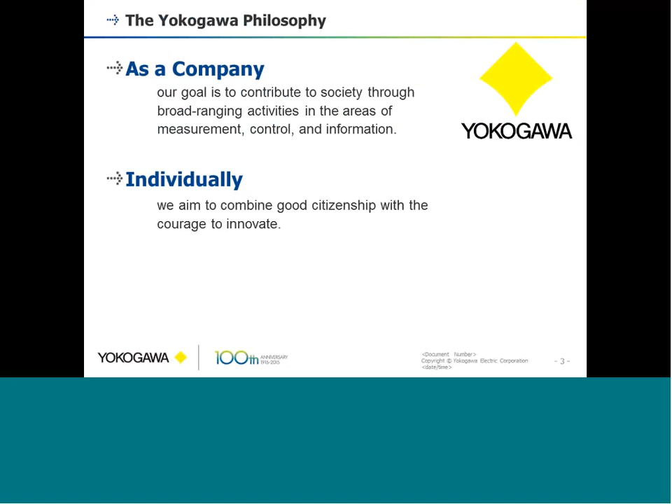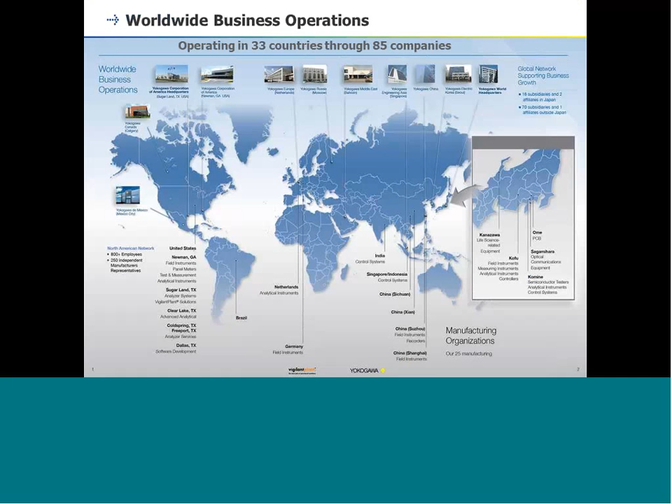We were founded in 1915 in Japan, and we came to the North America marketplace in 1957. We currently operate in 33 different countries with 85 different sales offices and companies within those countries. In North America alone, we have 4 headquarters: an office in Calgary, Canada, one here in Newnan, Georgia, just outside of Atlanta, one in Texas, and one in Mexico City.

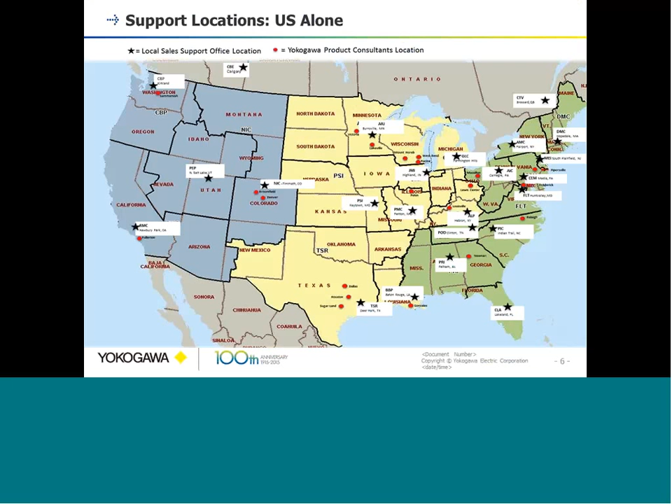Outside of these main headquarters, this is just the U.S. We have offices all over the U.S. for support of people right in your backyard.

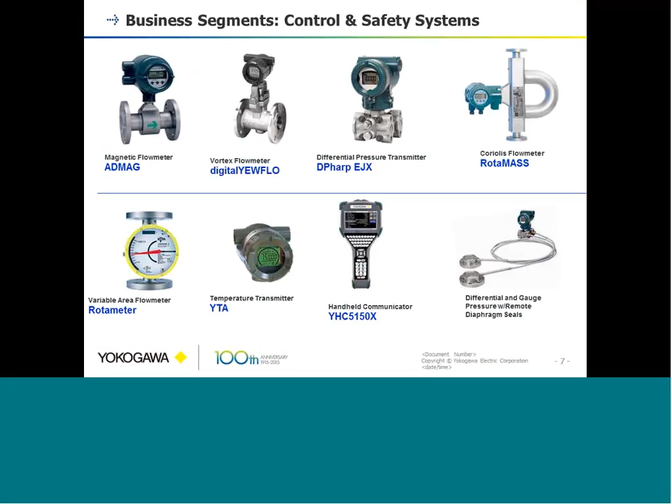For the industries and products that we offer, we have anything from control and safety systems that you'll use in your control room, to your field instruments, your pressure and temperature transmitters, to your data acquisition, controllers, recorders, signal conditioners, gas analytical measurements that you may have in your process, and your liquid analytical, your pH, your conductivity.

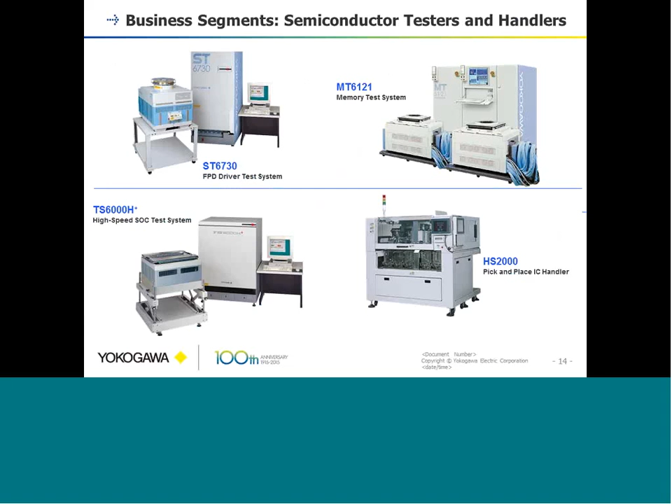We also have a system integration group called Measurementation, and they do anything from CEMS systems to actual sample panels, water analysis panels, complete shelters. We also have a semiconductor division, a test and measurement division, a meters division for calibrators, handheld communicators, and a life science division. So that just gives you a basic overview of Yokogawa.

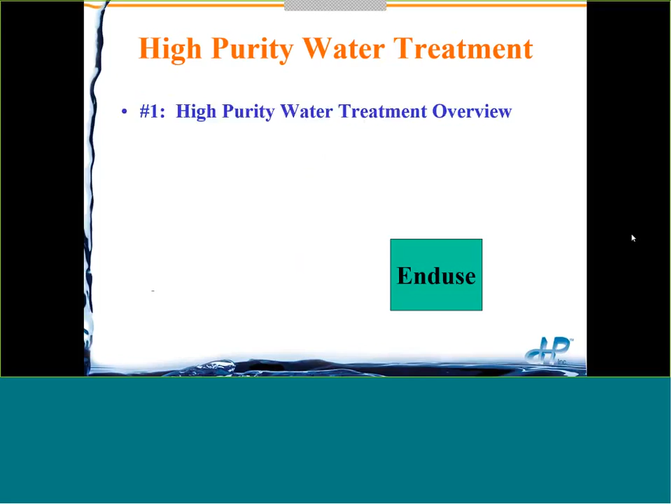With Yokogawa, we are doing a 4-webinar series basically on high purity water, but we're taking it section by section. So 2 weeks ago, we had a high purity water treatment overview, and in that overview, we looked at how in today's high purity water treatment systems, almost always you have reverse osmosis as one of the treatment steps. That's the big gun, the bulk total dissolved solids removal piece of equipment or technology.

And the equipment in front of the RO unit is called pre-treatment. It's there to protect the RO unit. We're going to talk about that in a couple of weeks.

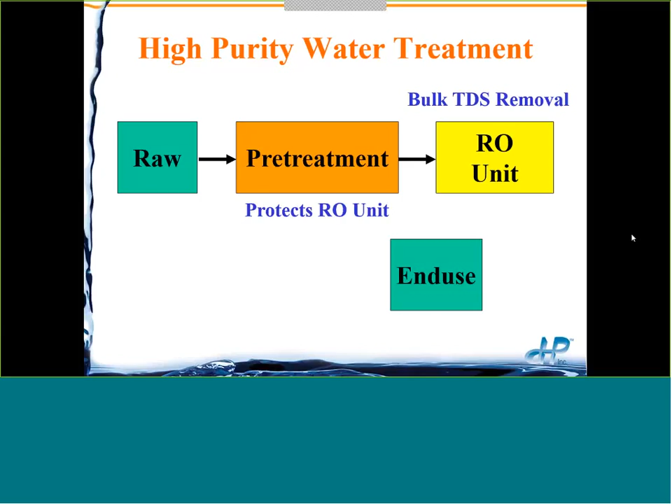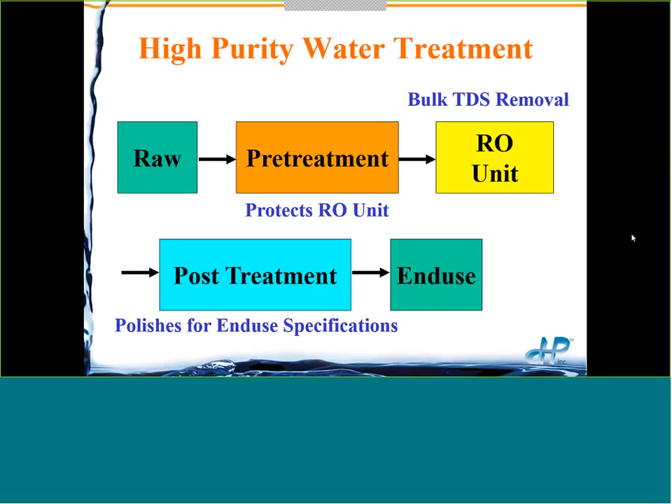And then the permeate coming out of the RO unit, since it rarely meets end-use specifications, we usually have to polish it. That's called post-treatment.

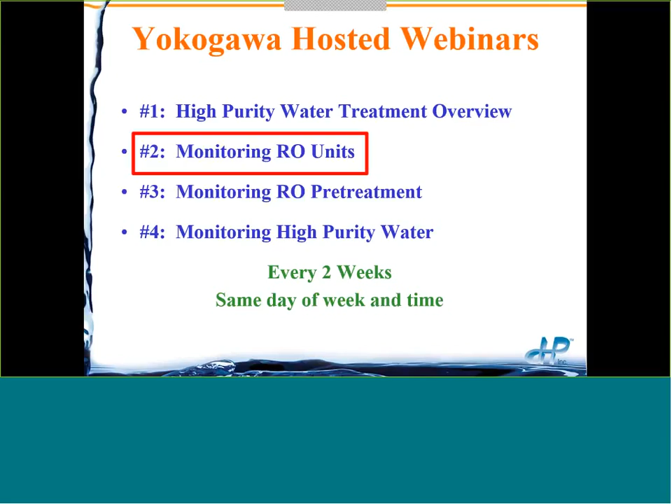We started out 2 weeks ago with the overview. Today we're going to talk about RO units, again with emphasis on monitoring and trending. Then 2 weeks from now, we'll do the same thing with pre-treatment. And 4 weeks from today, we're going to be looking at monitoring the post-treatment, or the high purity water. It'll be the same time and day of the week each time, just 2 weeks apart.

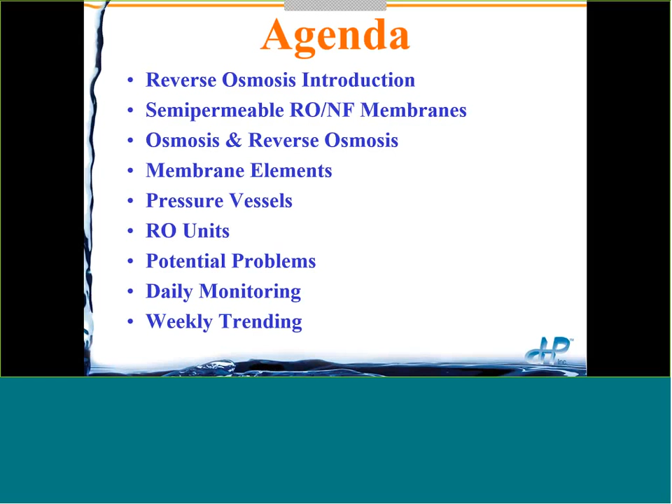So today we're looking at reverse osmosis. This agenda that you see - we have 1 day, 2 day, and 3 day seminars that cover basically this exact same agenda. So in 1 hour, we're not going to be able to go into a lot of detail, but you'll get the high points and understand when we get to the monitoring and trending.

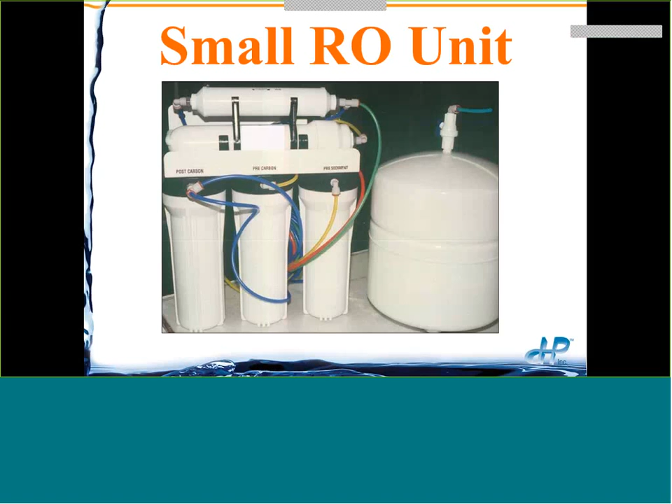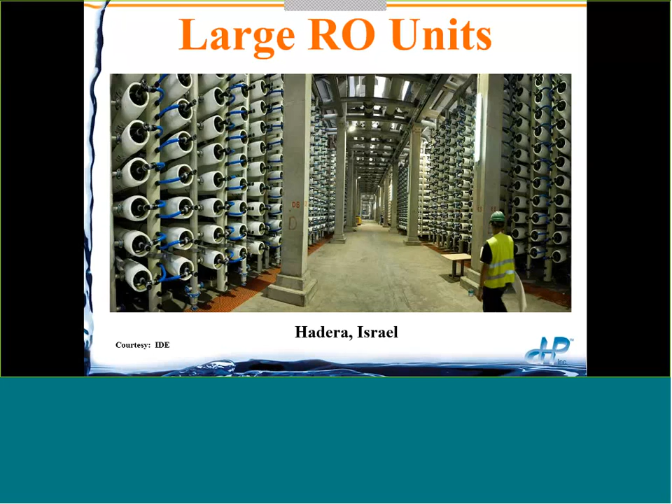Just a quick introduction. Everything I'm going to say is going to be true for the smallest RO units or the largest RO units. Reverse osmosis is reverse osmosis. Whether we're talking freshwater, brackish water, or seawater, the principles are the same. The pressures are going to be different, but the principles of operation are going to be the same.

So here is a particle size scale, and this isn't precise, so you're not going to see this in a chemistry course. But I think it's valuable in today's water treatment to think of 1/100th of a micron - a human hair is about 100 microns. So 1/100th of a micron is very small. Things that are larger than that are particles.

So we see here some examples. Virus - we know that's a very small particle. Even if we chop the virus up into 100 little pieces, our most powerful microscopes would still see a little piece of something, and we would call that a particle. You'll hear them called suspended particles, but just think of it as a particle.

If they're smaller than that, then they're dissolved. We have conventional water treatment that's been developed over the last 100 years or so to remove the bigger particles. But in today's world, if we want to remove particles greater than around 1/10th of a micron, we're almost always going to use membrane technology. We're going to make a membrane that has holes or pores through it of 0.1, 0.2 micron.

We call that membrane technology microfiltration. If we want to remove essentially all particles, then we'll have a membrane that has pores through it in the 0.01, maybe to 0.05 micron range. We're going to call those ultrafilters, and that's an ultrafiltration technology.

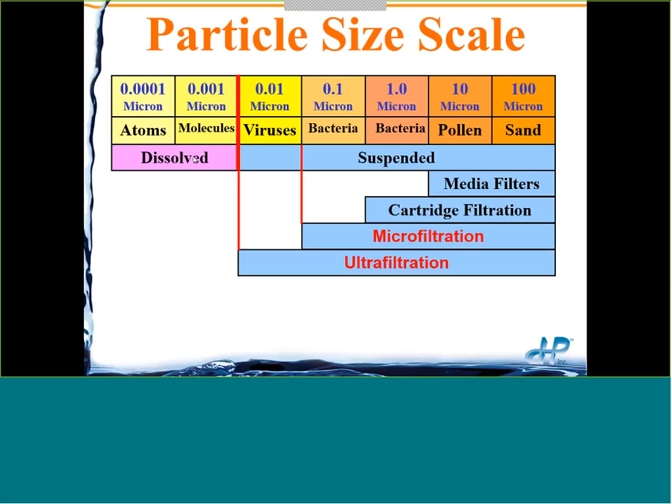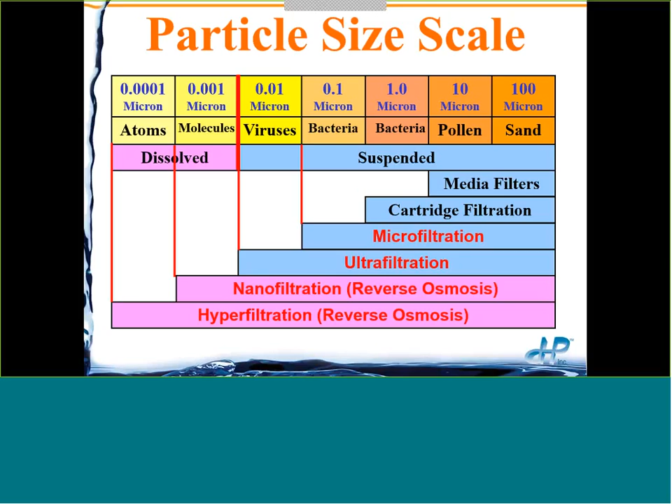But when we want to remove dissolved substances, we are now in reverse osmosis. Reverse osmosis comes in 2 flavors: nanofiltration, which is a looser RO membrane, and hyperfiltration, which is the tightest membrane. You don't hear the word hyperfiltration very often. You usually hear MF for microfiltration, UF for ultrafiltration, NF for nanofiltration, and RO for hyperfiltration. But just remember that nanofiltration removes dissolved substances, therefore it is a reverse osmosis membrane.

These membranes are semi-permeable. They're permeable to water molecules - in other words, water molecules can pass through in either direction readily. Not very permeable to much else. So suspended particles - if the membrane was perfect, then no suspended particles would go through. And if the O-rings were perfect...

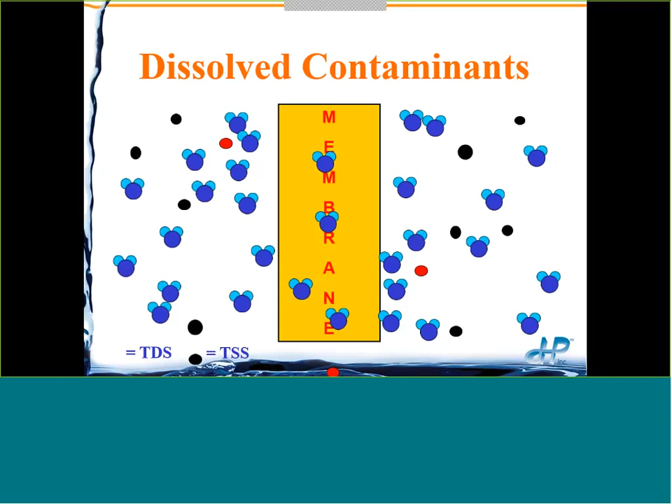Dissolved substances, though, do pass through - the little red balls there are dissolved substances, but they pass through slowly. So that's different. This isn't like a filter that we're used to, where if the contaminant is larger than the pore size, it will never go through. Well, that's not the case with RO. The dissolved substances can go through by diffusion, which is random motion, but they don't go through very quickly.

The charged contaminants, and this is going to be most of what we deal with in water treatment - calcium, magnesium, potassium, bicarbonate, sulfate, chloride - all these things that have positive and negative charges are very, very well rejected by RO membrane. And the more charges a substance has - we call these ions, if they're charged we call them ions, or ionic - well, the more charges, the better the rejection.

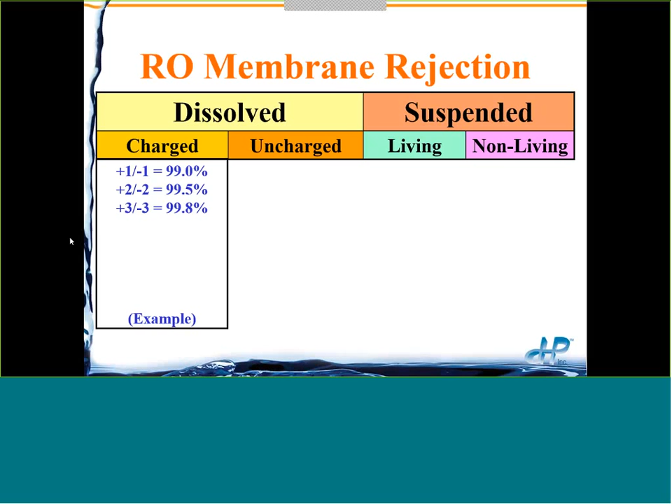Uncharged things have to be rejected based upon size. That's why water molecules go through - water is uncharged, even though it's polar. It does not have a +1, +2, -1, or -2 charge. It's neutral, and it has a small molecular weight of 18. So anything with a molecular weight of 18 or smaller and is uncharged is going through that membrane.

The gases - oxygen, nitrogen, CO2, hydrogen sulfide, all of the gases dissolved in water - go through the membrane. There's little, if any, rejection of dissolved gases. Other things like uncharged organics and uncharged silica have to be rejected based upon size, and we infer or approximate that size from the molecular weight, MW.

We know water has a molecular weight of 18, so we'll round it off. These are just approximations I'm showing you here: 0 to 20 molecular weight, there's going to be no rejection. By the time you get to 50 molecular weight, maybe we're up to 40, 50, 60% rejection. By the time we get to 100 molecular weight, we're probably in the 90% rejection range. And by 200 molecular weight, now we're into very high rejections. So the larger the uncharged substance, the better the rejection.

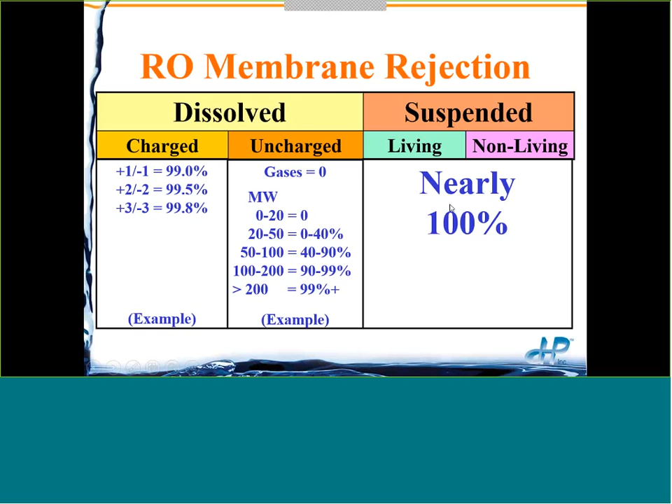A perfect membrane, if it's able to reject suspended substances, would be 100%, but nothing's perfect, so you'll get a few of the tiniest suspended particles that go through - but it's nearly 100%. Okay, so now let's move on to the next topic, osmosis and reverse osmosis.

Osmosis is the tendency of water to pass through a semi-permeable membrane into a solution of higher TDS. In this picture, the rectangle is an RO unit - it could be the smallest RO unit in the world or the largest. The diagonal line is all of the membrane, all of the semi-permeable or RO membrane that is in that RO unit.

When your high pressure pump is off, if you have feed water on one side and permeate on the other side of the membrane, osmosis will occur, because osmosis is the tendency of water to pass through a semi-permeable membrane from lower TDS to higher TDS.

For those of you dealing with seawater RO units, especially ones that have been around a long time, you'd have a suck-back tank. So when you shut down your RO unit, there was enough permeate to suck back and provide the water for osmosis. You don't see that as much today, but it was very common a long time ago.

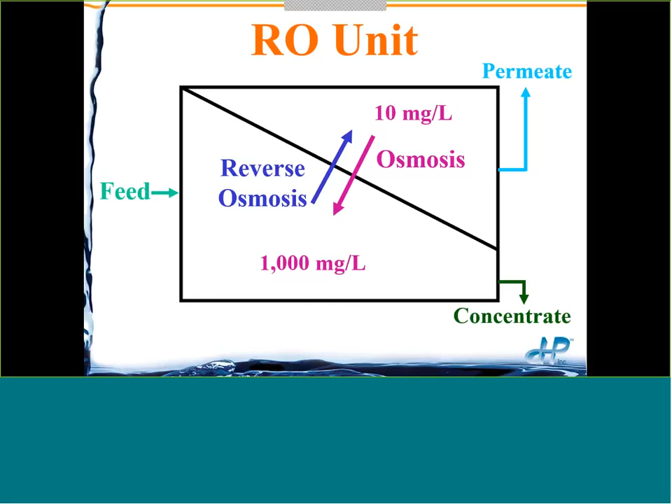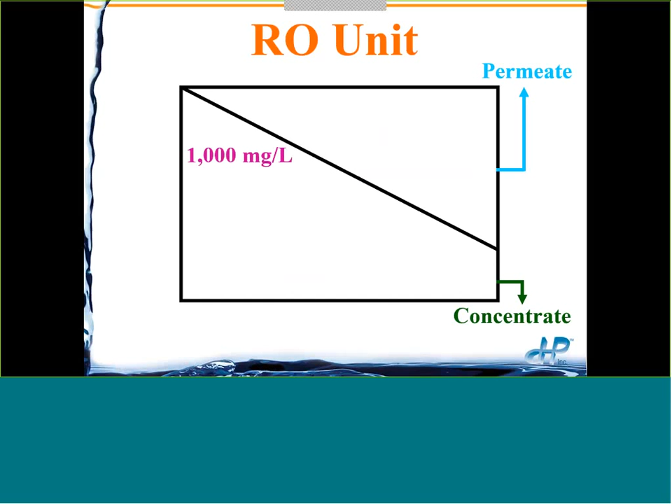To reverse osmosis, we have to get water to go in the opposite direction, from the feed side to the permeate side. To do that, we have to overcome the back pressures - there are two back pressures we have to deal with. The osmotic back pressure, which is really the force of osmosis, is a function of the dissolved solids content on the feed water side of the membrane.

In American units, you just divide this by 100, moving the decimal place over 2, which gives you a ballpark osmotic back pressure - not exact, but a ballpark. In metric units, you divide the milligrams per liter by 1,500, which gives you an approximate bar pressure for osmotic back pressure. So we have to overcome the osmotic back pressure, and we have to overcome the permeate back pressure.

If the permeate is going right to an underground tank, there would be very little back pressure. If it's going into a 30-foot or 10-meter high tank, then we're probably looking at close to 15 psi or 1 bar of back pressure. We have to overcome these back pressures in order to reverse osmosis. In this case, we have 25 psi or 1.7 bar of back pressure.

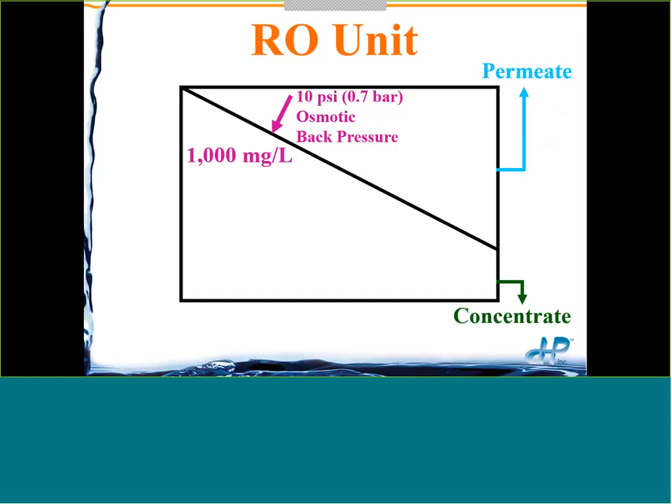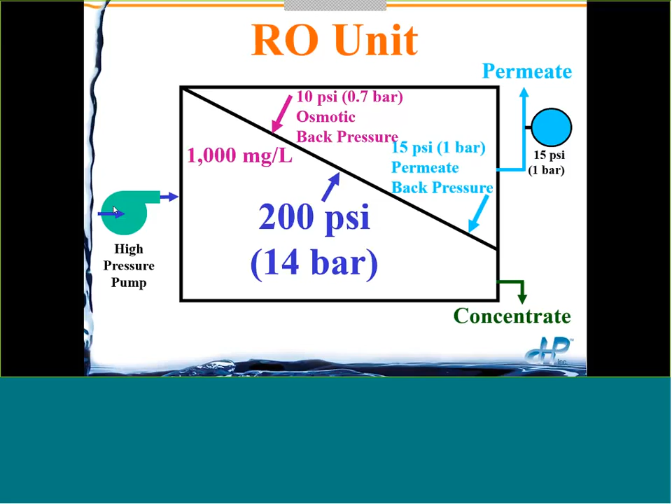So we are going to take a high pressure pump - whoops, sorry, went the wrong way - take a high pressure pump, pre-treat the water, pressurize it, and give it enough pressure to overcome the back pressures and reverse the direction of osmosis, and that's what we call reverse osmosis.

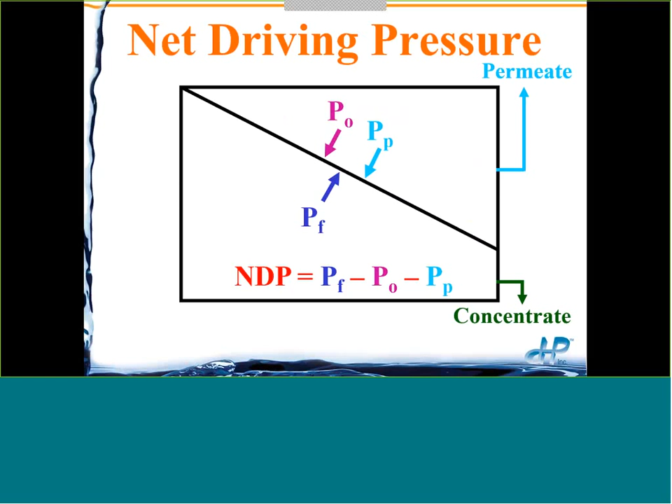Net driving pressure is what forces water through the membrane, and that's simply the feed pressure minus the two back pressures: the osmotic back pressure and the permeate back pressure. In a longer course, we would spend 30 minutes to an hour and have you play with calculating net driving pressure.

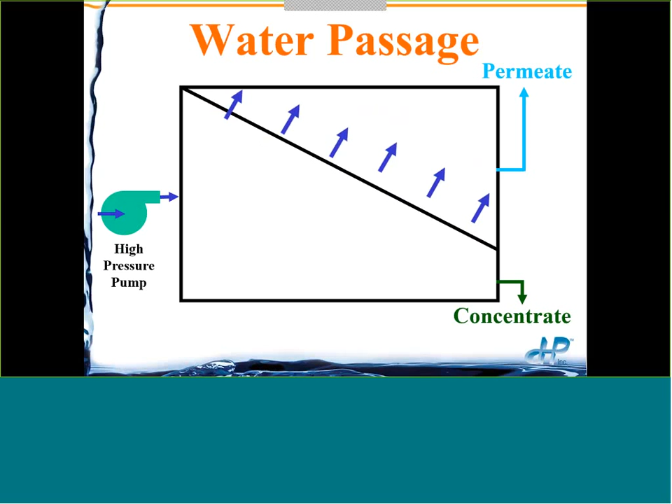For this, what I want you to see is this is the way RO units work. You take a pre-treated feed water, pressurize it in a high pressure pump, and send it into an RO unit. Due to the net driving pressure, you force a lot of water molecules through that membrane. The dissolved substances can't go through the membrane very readily, so they're concentrated. Every inch or centimeter of the way from the feed to the concentrate, also called brine or reject, the total dissolved solids, the TDS, are concentrated more and more.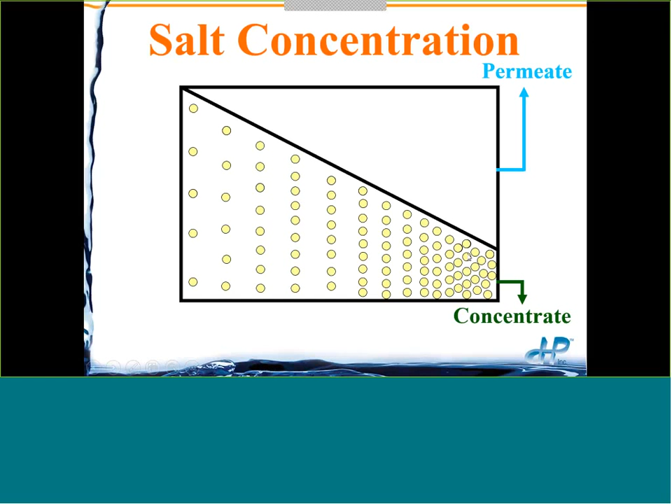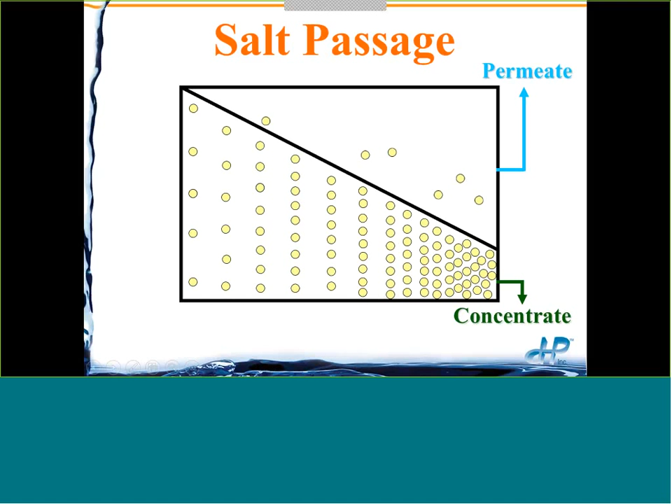But they're all diffusing, moving randomly, and due to that random motion there's a certain amount of diffusion. You have more concentration in the last inch or centimeter than in the first, so you have more diffusion in the rear of the RO unit than in the front. That means you're going to make better quality permeate at the front and worse quality permeate in the rear.

So putting those two together, the way RO units work is you take this pre-treated feed water to a high pressure pump, which gives a net driving pressure that forces a lot of water molecules through. Every given moment there's a little bit of diffusion, which is diluted by a whole lot of water molecules. That's how we can go from seawater at over 40,000 milligrams per liter to drinking water of less than 300 to 500 milligrams per liter.

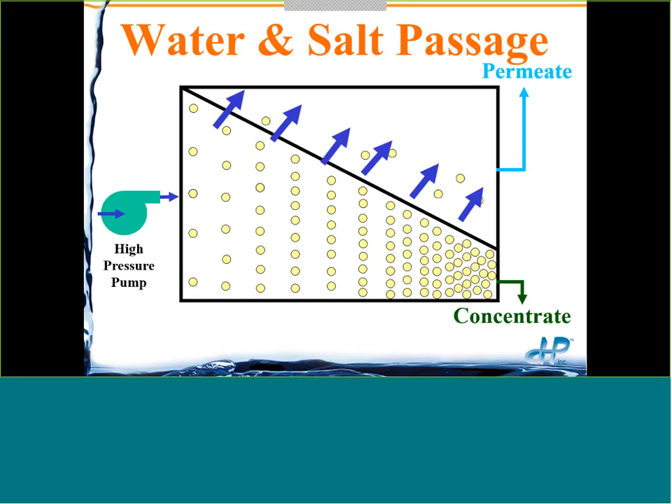Excellent technology. One other thing to know about membranes is that temperature has a huge impact on your pressure requirement. As water is warmer, it's less viscous—you can think of it as thinner. So the warmer the temperature, the lower the viscosity, and the lower the viscosity, the lower the net driving pressure required to produce the same amount of permeate.

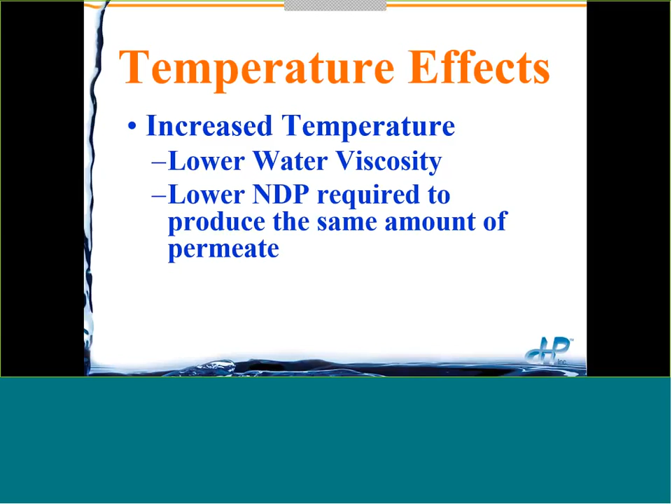So if you're in a place where your feed water is warmer in summertime and colder in wintertime, you'll have to apply the least amount of pressure in summer, and the most amount of pressure in winter, to make the same amount of permeate.

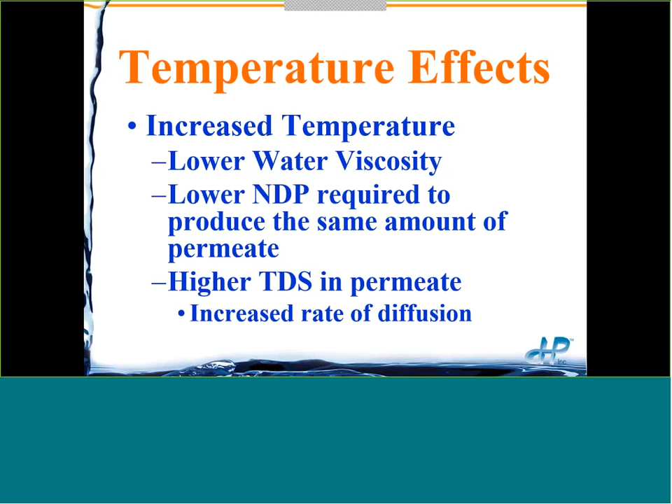The other impact of temperature is on diffusion. As the temperature is warmer, dissolved substances can diffuse through the membrane easier. So in the summertime you'll make your lowest quality permeate, and in the wintertime you'll make your highest quality permeate.

Okay, so that's talking about the membrane. Now the membrane is put into a piece of equipment called a membrane element. Again, we'd spend an hour or two—in our seminars we actually have you make simulated RO elements so you know exactly how they work. We're just going to look at them here.

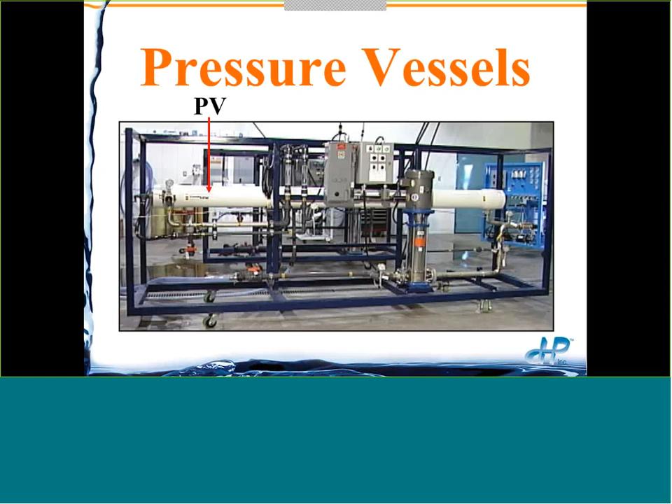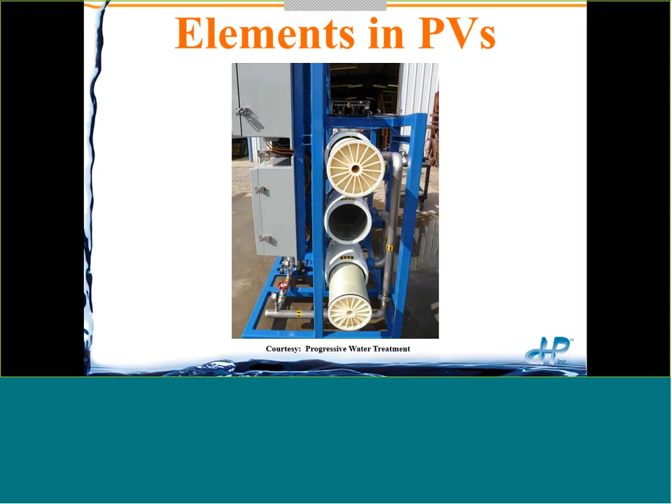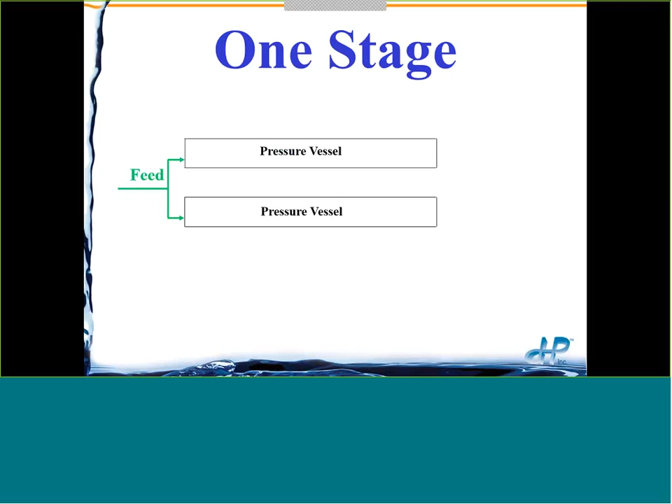The pressure vessels, in parallel and in series, then make up the RO units. If the high pressure pump is only feeding one set of parallel pressure vessels, each pressure vessel produces permeate—that's the water that goes through the membrane—and each pressure vessel produces brine, reject, or concentrate. If the feed water just goes to one set of parallel pressure vessels and the concentrate then goes to drain, that's called a one-stage system.

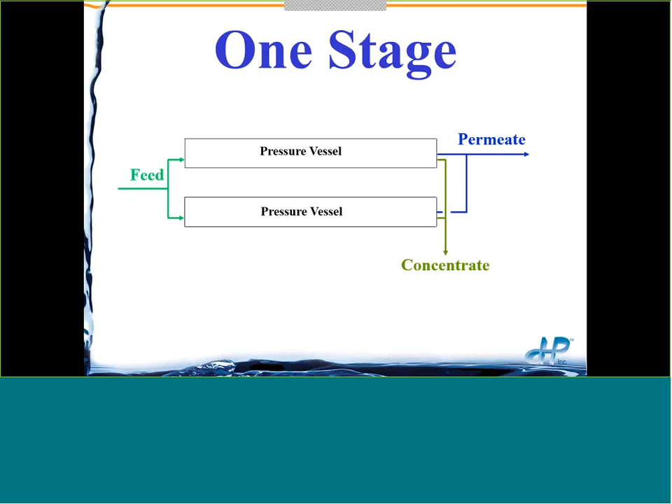99.99% of all seawater RO units are going to be one stage, because a stage will give you roughly 50% recovery, meaning 50% of the feed water will go through the membrane. Seawater RO units on real seawater, not dilute bay water, will be less than 50% recovery. In industrial applications, the most common is 75% recovery.

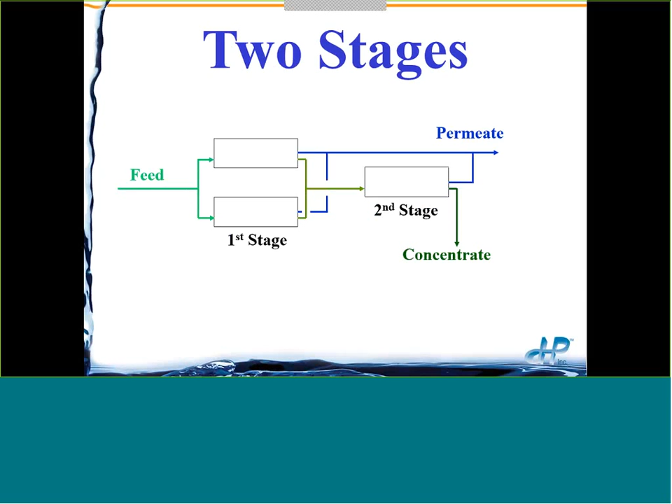In this case, we take the concentrate from the first stage and send it to a smaller number of pressure vessels - that's called the second stage. When you're getting into 75-80% recovery RO units, you'll typically see a 2-stage system. If you go higher, to 85-90% recovery, it's not uncommon to see 3 stages.

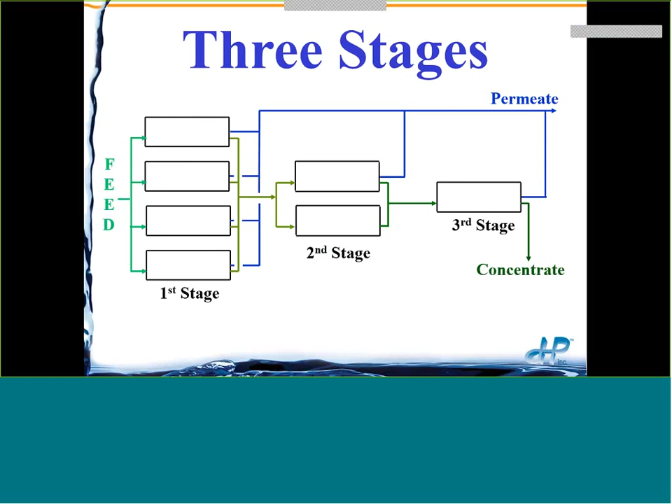So we've talked about how RO systems are put together and basically how they work. But there are 3 problems that we have to treat, operate, monitor, and maintain our way out of: scaling, fouling, and chemical attack.

You won't see our definitions everywhere - this is not a universally accepted definition, but this is our definition. You'll sometimes read an article that talks about calcium carbonate fouling. We would never say that - for us, it would always be calcium carbonate scaling. We want to distinguish between scaling and fouling. For us, scaling is caused by dissolved substances in the feed water that precipitate out in the RO unit due to concentration.

As you concentrate dissolved substances - I'm talking about calcium+2, carbonate-2, calcium+2, sulfate-2 - you get these mainly double-charged positive and negative ions close enough together that at a certain point they're as close as they can be, attracted to each other as much as to anything else in the water. At that point we call it 100% saturation - you can't get any more of the calcium and carbonate, for example, to dissolve.

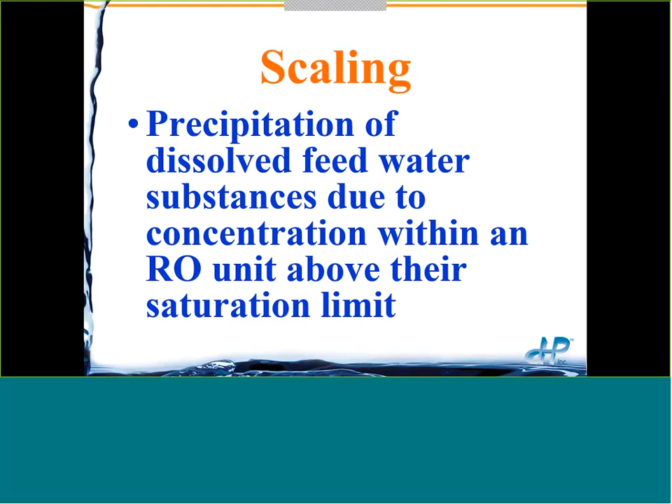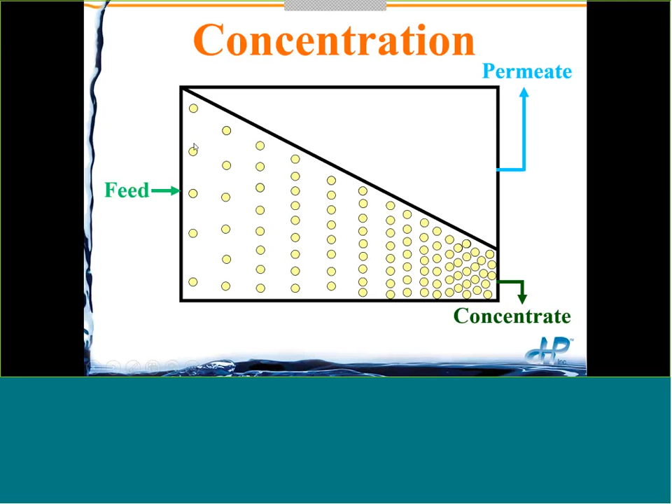Scaling is due to concentration. So if anywhere in this RO unit, from the first inch or centimeter to the last, you reach 100% saturation or exceed the capability of your scale inhibitor or anti-scalant to control the scaling, then from that point on you're going to scale. Scaling is a function of concentration.

Based on that, which element would most likely scale in this RO unit? You have a two-stage RO unit with 12 elements. If you guess number 12, you'd be right, because it's due to concentration. It's not uncommon for an RO unit to scale such that elements 7, 8, 9 may not be scaled, but 10, 11, 12 are, or maybe just 11 and 12. It just depends on when you've exceeded 100% saturation or the limitations of your scale inhibitor to control the scaling.

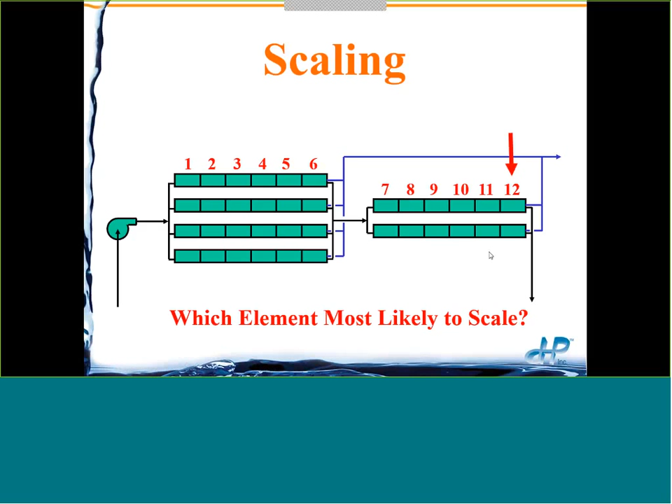All right, that's scaling - let's talk about fouling. For us, fouling is due to particles, which could be living or non-living. Could be bacteria, which are living, or dead bacteria, non-living. Or it could be silica particles, silt, clay, rust, iron - any particulate material that comes into the RO unit and stays would be fouling.

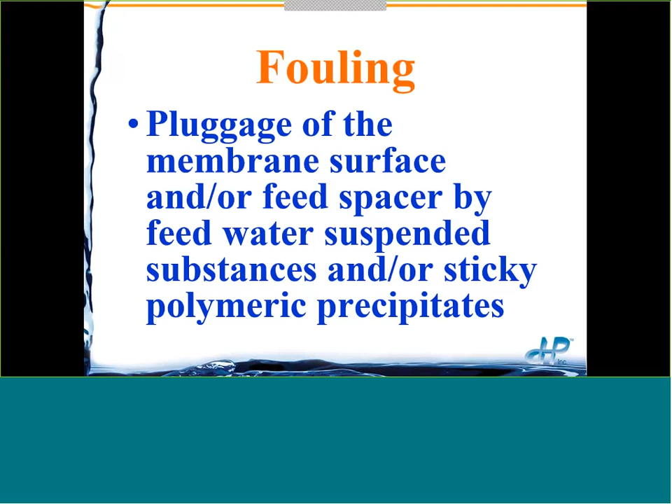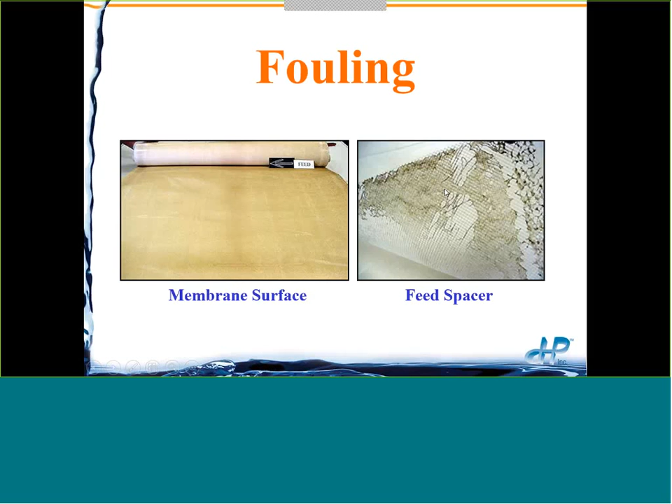This should be perfectly white - this is the foulant. This is the first element, and the feed is going from right to left. We can see there's more foulant in the first half of this element than in the second half, and that's very common - we'll see why in just a minute. We also see that the foulant is plugging up the feed spacer.

Just a couple of points: your fouling rate is really going to be a function of water flux and cross flow. The water flux is how much water you put through a given area of membrane in a given amount of time.

In American units, we call it GFD, gallons per square foot of membrane per day. In metric, we call it LMH, liters of permeate per square meter of membrane per hour.

The water flux rate changes every inch or centimeter of the way. If we look inside the pressure vessel, we see 4.67 gallons per minute, or 1.06 cubic meters per hour, being produced by the first membrane element.

It's even more dramatic than that, because the first inch or centimeter actually makes more water than this average, since the net driving pressure is higher there. As we go along, the amount of permeate produced drops, so every element makes less permeate. That means the water flux is highest in the first inch or centimeter and lowest in the last.

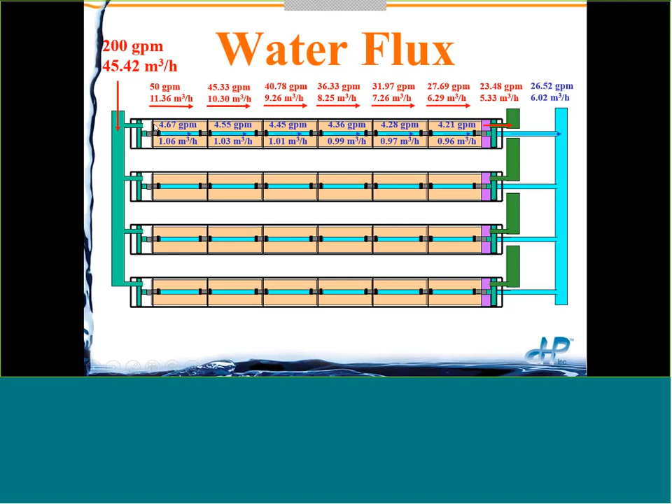Cross flow is the feed concentrate flow rate. If the feed is coming in, the part of the feed water that doesn't go through the membrane exits in the brine reject or concentrate stream—this is the cross flow. This flow rate keeps the surface of the membrane cleaner. It's a tangential flow, so think of it as a scouring or cleaning flow rate.

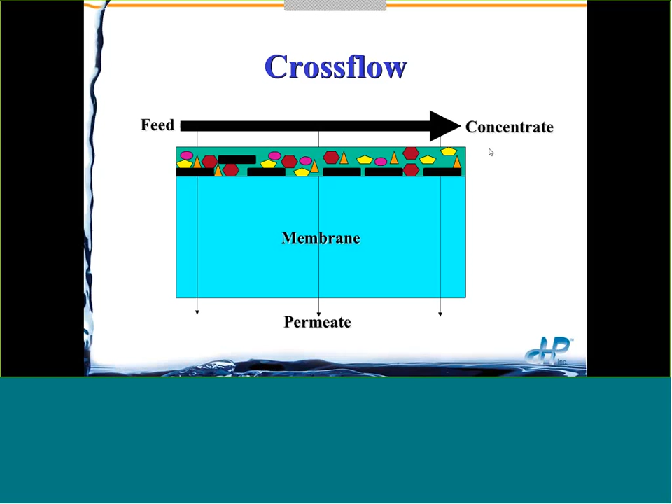Right at the surface of the membrane, you have what's called the boundary layer. Depending on the feed concentrate flow rate, the boundary layer can be taller, allowing more particles to lay out on the surface, or at a higher cross flow rate—meaning a higher feed concentrate flow rate—the boundary layer is smaller, so you have less fouling. So the water flux rate and the cross flow rate determine your fouling rate.

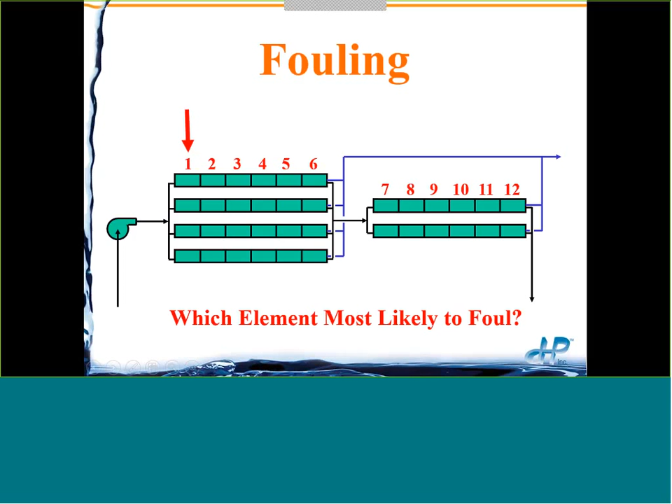Based on what we've just covered, which element, 1 through 12, would have the highest fouling rate—in other words, the highest water flux rate? If you guessed number 1, you got that right, because element number 1 always has the highest fouling rate since it has the highest water flux rate. Water flux is more important than cross flow in determining your fouling rate.

The last problem we'll talk about is chemical attack. Chemical attack is usually by oxidation, and usually that's chlorine. You actually can't see it—if you do an autopsy and open up the element, you can't see chemical attack directly.

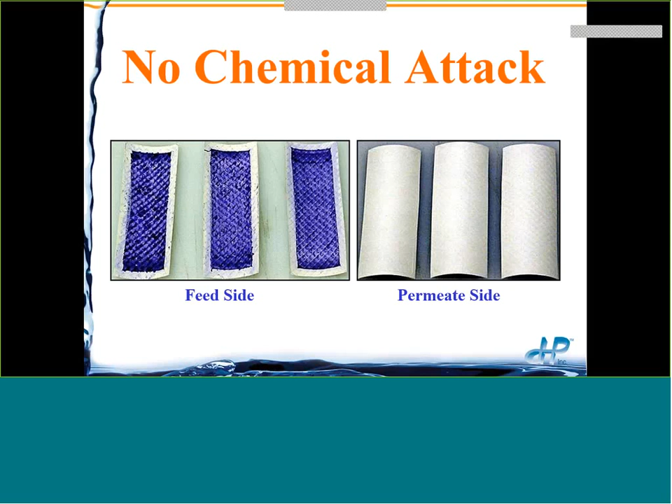But we use dyes on the feed side of the membrane. Here we see the dye is very dark on the feed side because bio and other things are absorbing the dye. But when we turn it over to the other side, we don't want to see any dye going through the salt rejecting layer of the membrane.

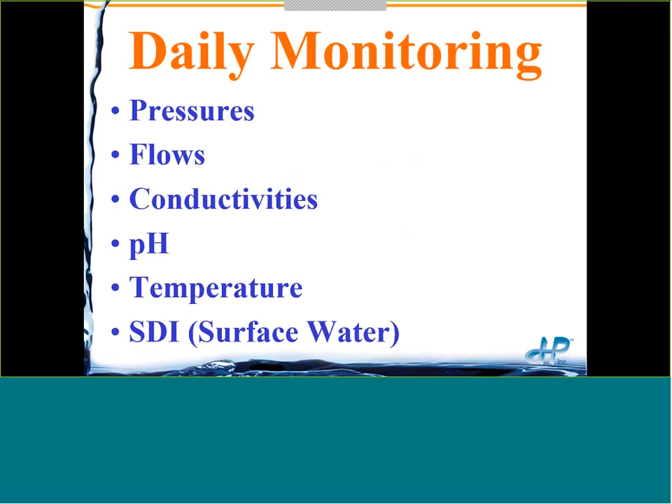We want to find these problems early, catch them while they're hopefully still reversible, and at the least cost to fix. So we have to monitor things you'd basically monitor in any water treatment plant—nothing too unique to reverse osmosis, except for the silt density index, which we'll talk about two weeks from now.

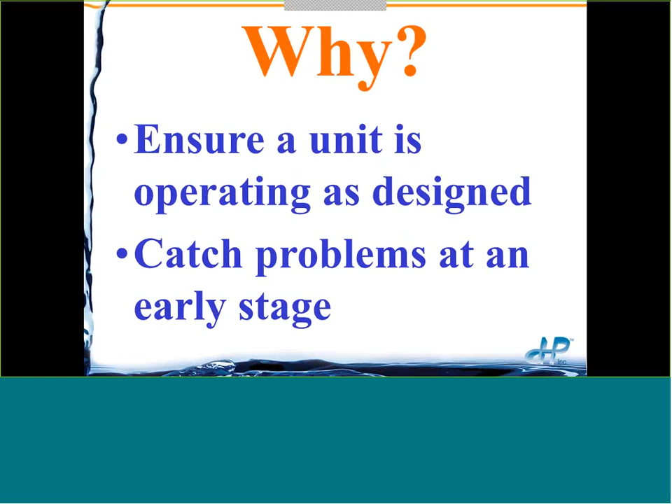Why do we want to do this monitoring? Again, to make sure we're operating as designed and catch problems at an early stage. Here, for a two-stage unit, are the nine instruments you absolutely have to have. These aren't nice-to-haves—they're absolutely necessary. If your RO units don't have these nine, you need to change that.

Temperature doesn't have to be right on the RO skid, but we have to have temperature somewhere on the feed water line, because we've already seen that temperature has a huge impact on the pressure requirement to make a certain amount of permeate. We also want the pressure of the feed, the pressure between the stages—the interstage pressure—and the pressure of the brine reject or concentrate.

We want that interstage pressure so we can see if the problem is in the first stage. If we see a higher pressure drop in the first stage, we're going to think fouling. Whereas if we see higher pressure drop in the second stage, we're going to think scaling.

Then to monitor the performance of the membrane, how well it's able to reject substances, we want a conductivity meter on the feed, and we want a conductivity meter on the permeate, so we can see how well the membrane is able to reject feed water conductivity. And then, of course, we have to know the flows, the flow of the permeate and the flow of the concentrate. And because of the net driving pressure calculation, we also need to know the permeate back pressure. So these are the 9 instruments that you absolutely have to have on any 2-stage RO unit.

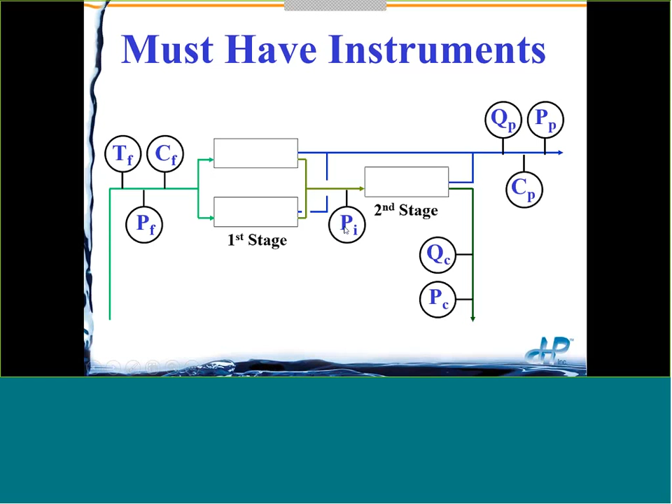On a 1-stage RO unit, you wouldn't have the interstage pressure, so you would only need the other 8.

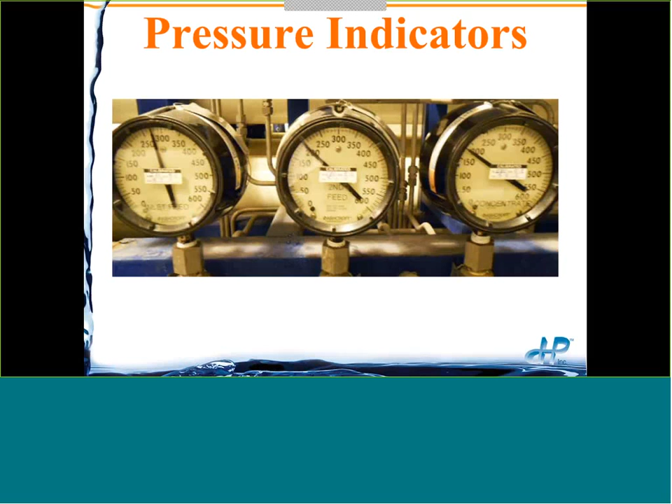And I just threw in a couple of pictures of, on some units, everything's going to be manual. You have manually controlled valves, open and closed valves, you just have pressure indicators, pressure gauges like this. Here we're looking at feed, interstage, and concentrate feed pressures for 1 RO unit.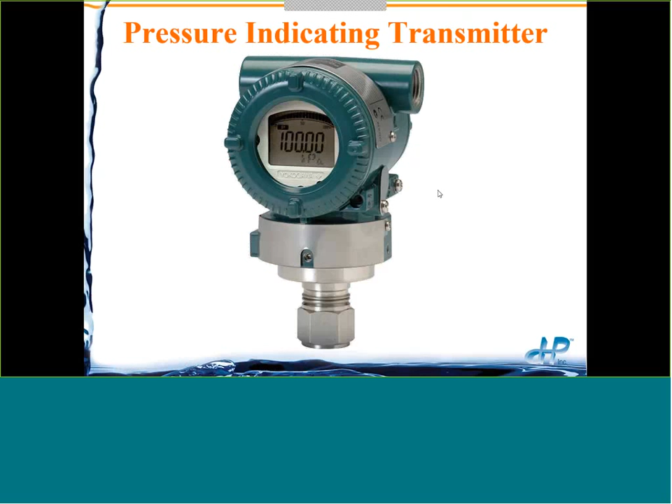Or for more expensive systems, then everything may be automated. You may have indicating transmitters everywhere. So if you go out to the actual RO skid, you can look and see what the pressure is here, but it's also sending signals to the HMI, the PLC, and it may be controlling, it may be a pressure indicating controller as well.

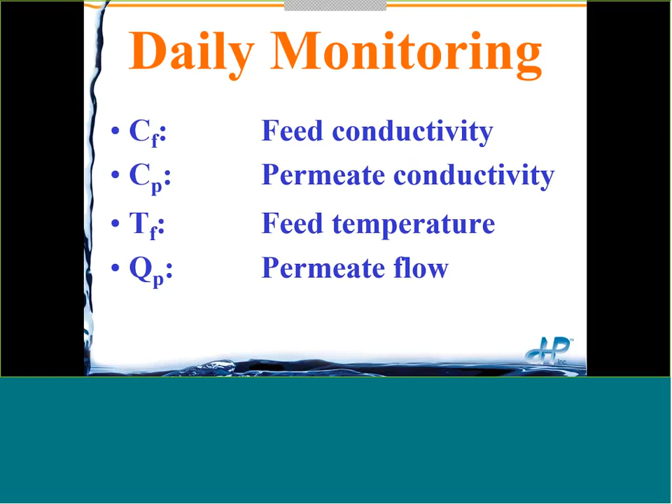So again, for your reference, the other instruments that you need, and just showing a couple of instruments. In this case, I'm just looking at indicating transmitters for conductivity and flow. And if you're injecting acid, then you have to have pH. Not very many systems inject acid. Most just inject antiscalant or scale inhibitor for scale control.

Okay, then the last section is not only is it important to monitor, but we need to trend this because nobody's going to remember what happened 6 months ago, 2 years ago. So we want to take the daily readings, but we want them trended.

And I find this is a weakness that a lot of plants have. Everybody takes the data. There's virtually no plants that don't have somebody going around and putting on a log sheet, okay, this is what the pressure is, this is what the temperature is. They're walking around and they're doing the daily monitoring. But it's absolutely critical that you trend at least 3 things.

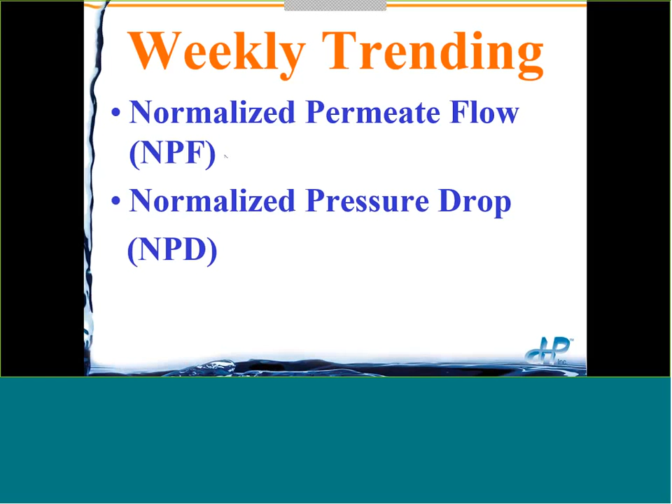So you want to monitor normalized permeate flow and normalized pressure drop. You want to do pressure drop across the first stage and second stage and trend that. Some of the membrane manufacturers' software normalize it, most do not. Most, you have to do your own monitoring of first stage, second stage pressure drops. And then normalize salt passage.

So just to wrap it up, and then we'll go to Q&A.

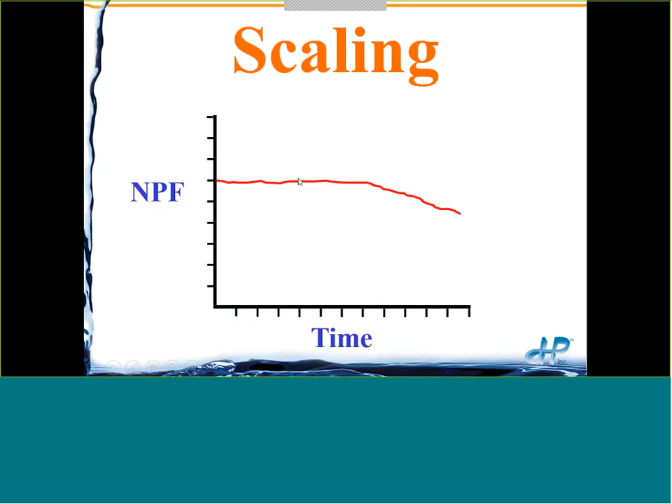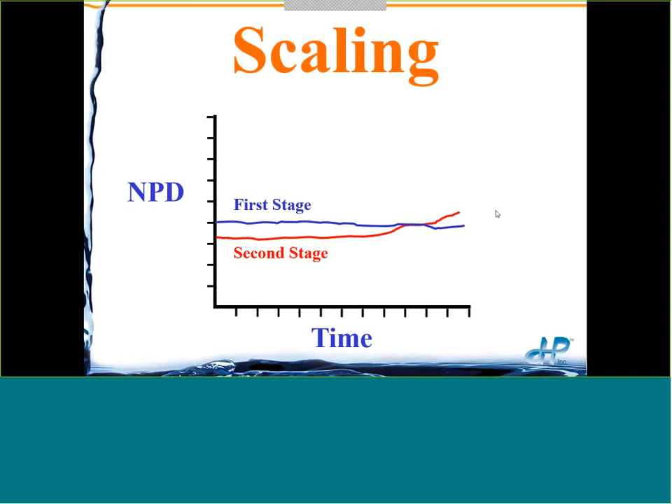Scaling: when normalized permeate flow drops, that means it's taking more pressure today than it took at startup. You've got something on the membrane, in the feed spacer, or both, causing you to supply too much pressure, and it's not due to something like colder temperature, which is accounted for in the normalization. Scaling or fouling will cause normalized permeate flow to drop, but when looking at pressure drops, scaling is a second stage problem, not a first stage. So seeing normalized permeate flow dropping with second stage pressure drop going up would be symptomatic of scaling, and salt passage goes up with scaling.

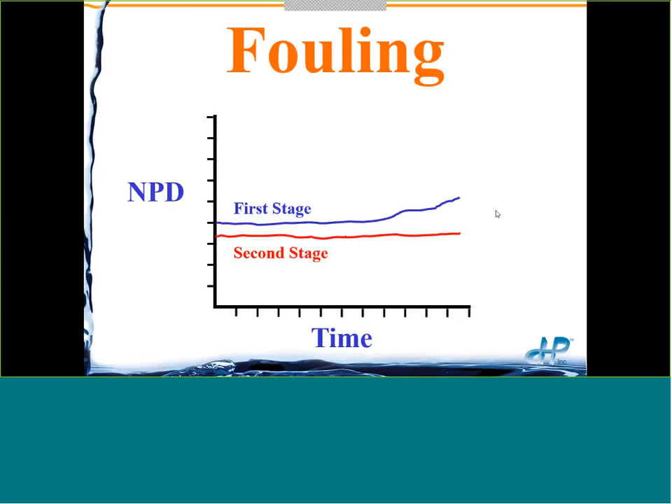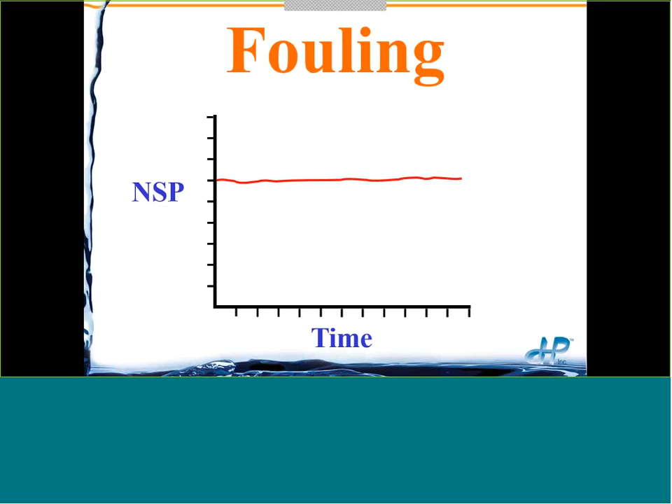For fouling, again, normalized permeate flow drops, meaning you're supplying more pressure than if the system was clean. But fouling is mainly, and certainly most of the time, a first stage phenomenon, especially at first. For fouling, sometimes salt passage will increase, but especially for bio or organics it may actually go down a little bit—you don't see a dramatic increase in salt passage.

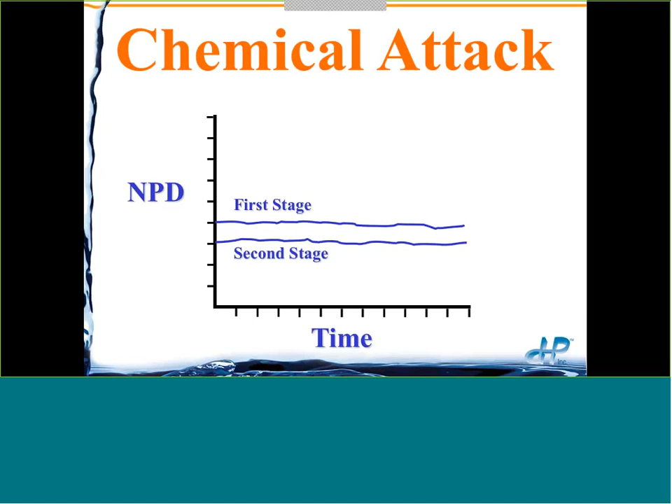Chemical attack—think of it as holes in the membrane—means it now takes less pressure to force the same amount of permeate through, so normalized permeate flow goes up. Chemical attack does not change the resistance of flow in the feed channel, so you don't see a change in pressure drop, but you certainly see a change in salt passage.

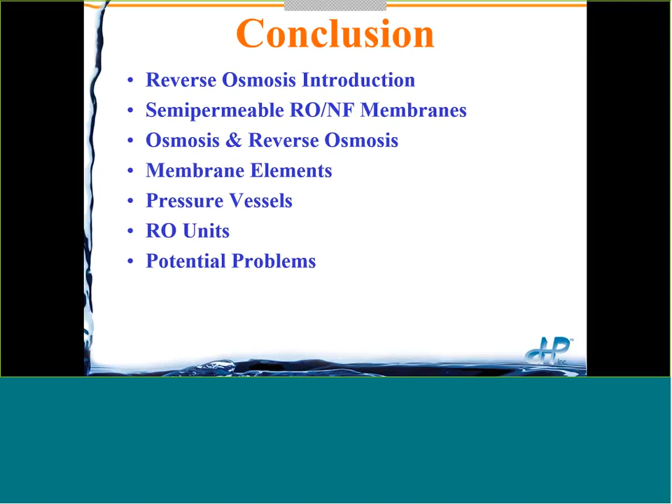What we've covered in this webinar: a highlight of the various theories and the pieces of equipment that go into an RO unit, so we can understand how an RO unit works. Then we looked at scaling, fouling, and chemical attack problems, and the daily monitoring and weekly trending requirements. Thank you so much for your attention.